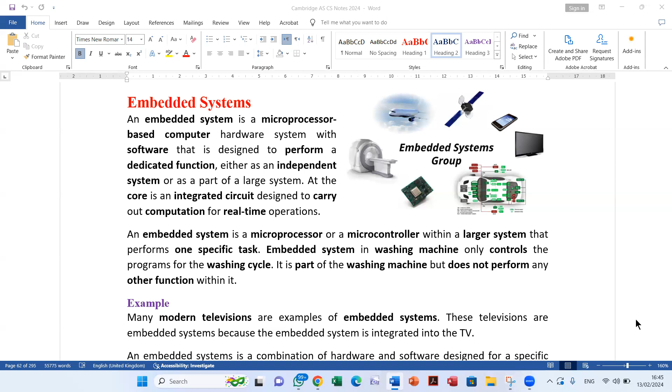So the system will do a function. At the core is an integrated circuit designed to carry out computation for real-time operations. An embedded system is a microprocessor or microcontroller within a larger system that performs one specific task, so it is dedicated. The embedded system in a washing machine can only control the program for the washing cycle. It is part of the washing machine but does not perform any other function within it. So this is an embedded system.

Let us go through as many examples as we could. One example of an embedded system is a modern television. Many modern televisions are examples of embedded systems because the embedded system is integrated into the TV. So maybe the question is asking why this is an embedded system - because the embedded system is integrated into the TV. The computer is inside the TV and can never be taken out of that TV to do something else. So that's an embedded system.

An embedded system is a combination of hardware and software. Any computer system is a combination of hardware and software designed for a specific function. So it is embedded, meaning it is for only one specific function. The system is not easily changed by the TV owner - you cannot easily change that computer to control anything else. It is forever inside that television, so it is an embedded system.

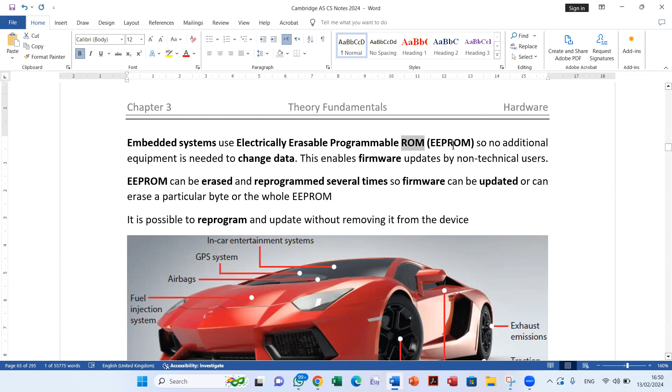Okay, let us take another example about an embedded system: a car alarm system. Sensors could be used in the car alarm, such as a sound sensor. So one of the sensors that can be used in the car alarm system is a sound sensor.

If a sound occurs inside the car, the alarm is activated. You have the car closed and locked, and supposed to be nobody inside of it. If the sensor can pick up some noise from inside of the car, this is interpreted as an intruder. So if a sound occurs inside the car, the alarm is activated.

An infrared sensor senses the heat of the person in the car. So we would like to protect the car with as many sensors as possible. A pressure sensor can sense an intruder who sits on the driver's seat. So if somebody sits in the driver's seat, the pressure sensor detects that intruder.

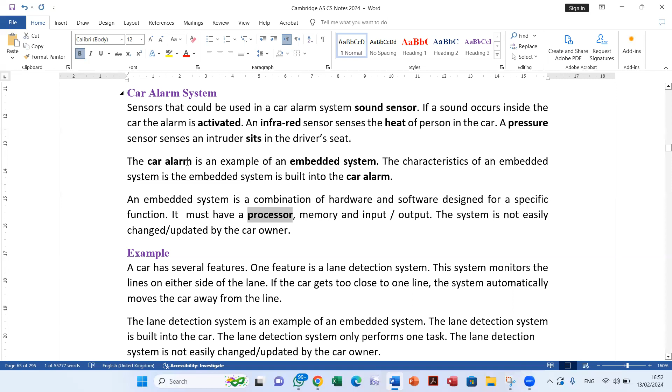Input and output: inputs are normally from sensors, outputs are normally to actuators to control things. The system is not easily changed or updated by the car owner because it is an embedded system.

The last thing to say about cars: as you can see, there are so many embedded systems in cars, like the car alarm. A car has several features. One feature is the lane detection system. The computer inside of the car can see, using a sensor in the front of the car, the lanes. So one feature is a lane detection system.

The system monitors the lines on either side of the lane. If the car gets too close to one line, the system automatically moves the car away from the line. So it is an embedded system.

The lane detection system is an example of an embedded system. It is built into the car and only performs one task. That's why we call it an embedded system. The lane detection system is not easily upgraded or changed by the car owner.

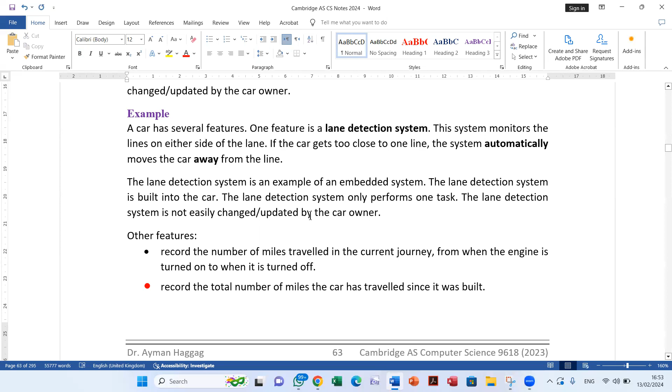Other features - what are other possible features in a car? Recording the number of miles traveled in the current journey, from when the engine is turned on to when it is turned off, is another example of an embedded system in a car. Recording the total number of miles the car has traveled since it was built is another example of an embedded system in a car.

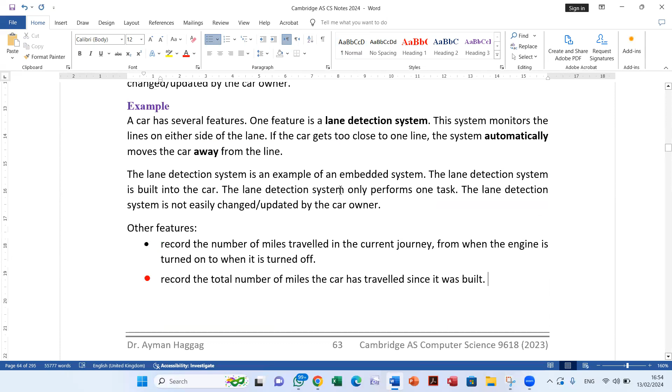Okay, let us talk about monitoring and control systems. An embedded system could be a monitoring system, or an embedded system could be a control system. Let us see all these monitoring and control systems.

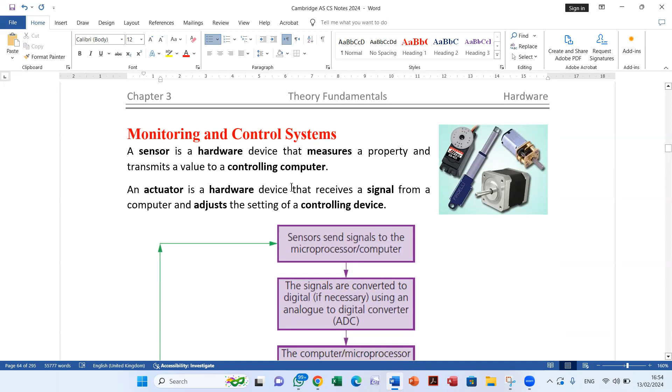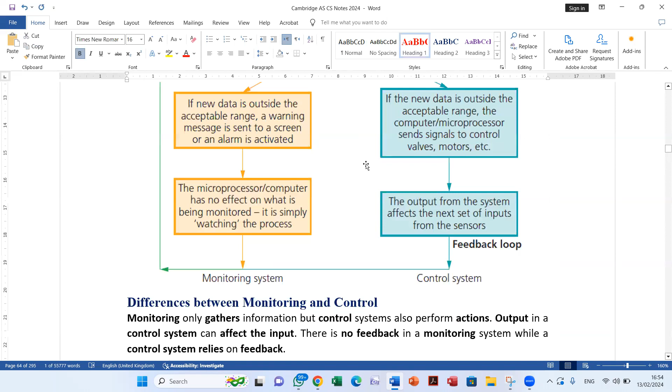Let us study this diagram to know exactly the differences between a monitoring system and a control system. There are things in common. What is a monitoring system?

A monitoring system measures quantities, and if they are out of range, the system only gives an alarm. This is called a monitoring system. For example, monitoring the temperature of the atmosphere, or monitoring pollution levels in a river. This is just a monitoring system.

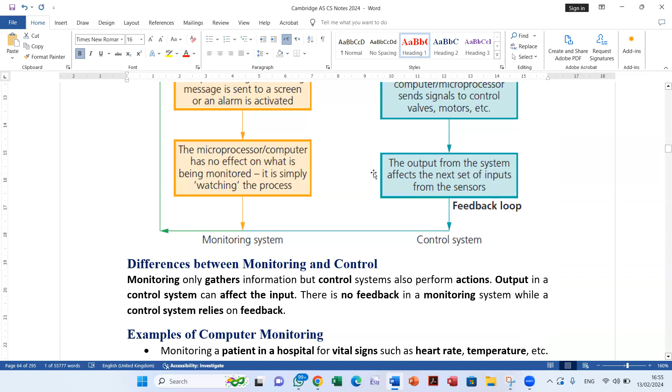However, a more complex, more functioning system would be a computer control system, where, for example, if the temperature is too cold, the computer can take action, such as turning a heater on. Or if the temperature is too hot, the computer can take an action, for example opening windows or turning on a fan.

Okay, so let us study this diagram. A sensor is a hardware device that measures a property and transmits a value to a controlling computer. You may have a temperature sensor that senses the temperature, or a pH sensor that measures the acidity or alkalinity of a liquid.

This could be in a chemical factory or could be in a river where you suspect to have pollution.

A sensor is a hardware device that measures a property and transmits a value to a controlling computer. An actuator is a device that receives a signal from a computer and adjusts the setting of a controlling device. For example, an actuator would turn a heater on or off, or change its temperature. An actuator would switch a fan on or off and control its speed.

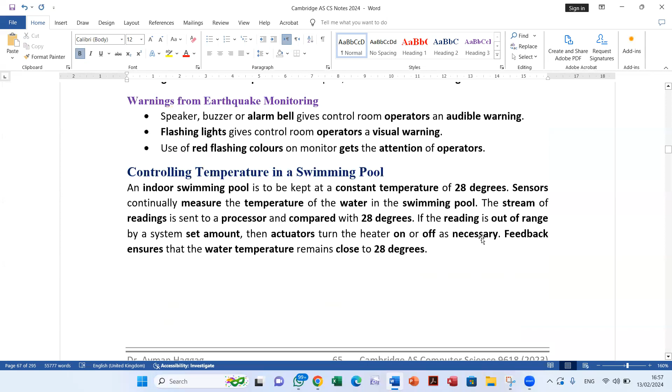In both computer monitoring and computer control, we have sensors that send signal to the microprocessor or microcomputer. So typically input is through a sensor. Signals are converted from analog to digital if necessary, using an analog to digital converter. For example, a temperature sensor needs an analog to digital converter, and even a sound sensor needs one, because sensors produce analog signals and the computer can only understand and deal with digital data, ones and zeros.

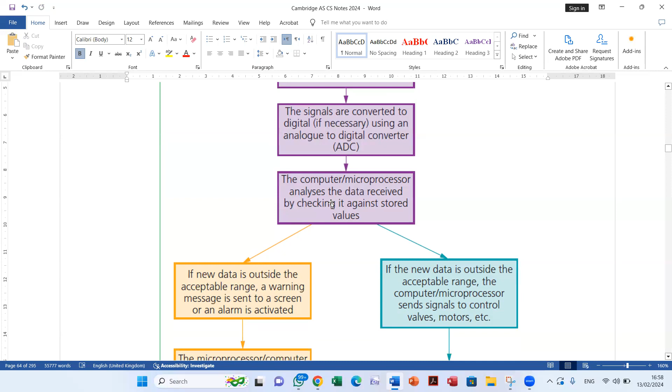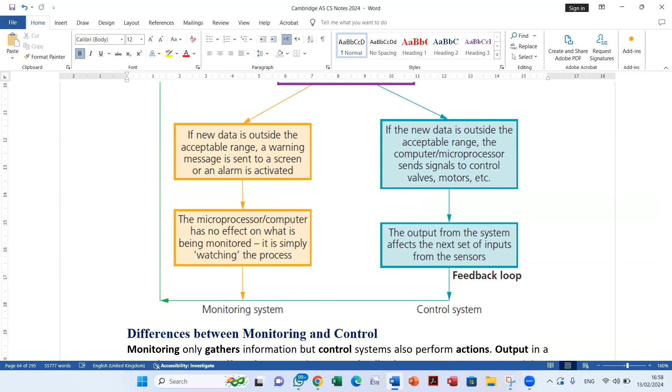Then the computer analyzes the reading and compares it with preset values. Here the two systems differ. If the computer is only monitoring and the data is outside the acceptable range, the computer only produces a warning. So if it is only computer monitoring and the reading is too hot or too cold, the computer would sound an alarm, and that's it, because it is just a monitoring system.

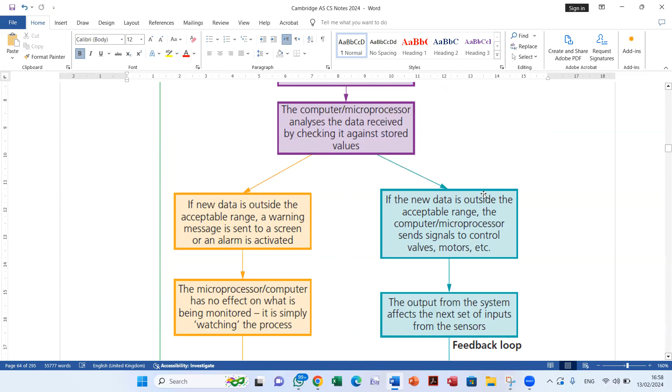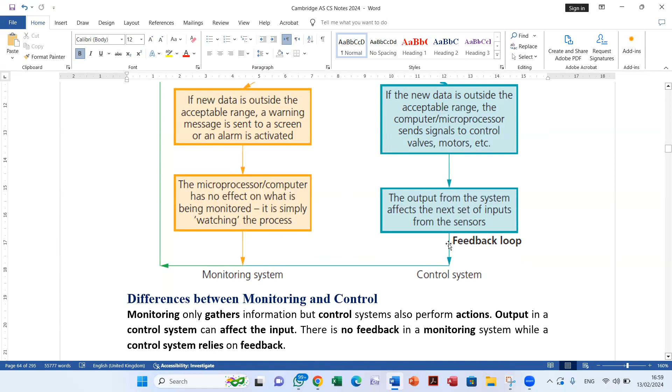However, if it is a control system, if the temperature is too cold, the computer will switch on a heater. If the temperature is too hot, the computer will switch on a fan or open a window for ventilation. This is called feedback. In a control system there is some sort of feedback because the system changes the temperature and the temperature is input again to the system, so it is a kind of closed loop.

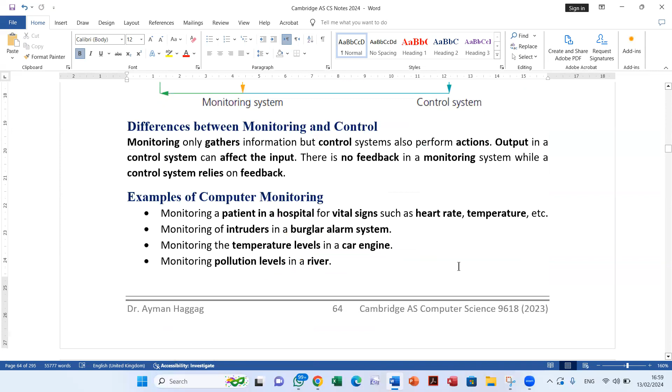That was a bit about monitoring and control systems. Differences between monitoring and control systems: monitoring only gathers information, but control systems also perform actions. Output in a control system can affect the input. There is no feedback in a monitoring system, while a control system relies on feedback.

Examples of computer monitoring and also examples of computer control. Let us study a few examples and then we go to the classify and solve.

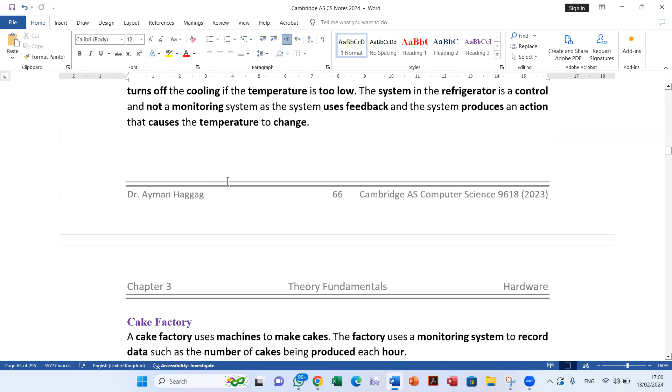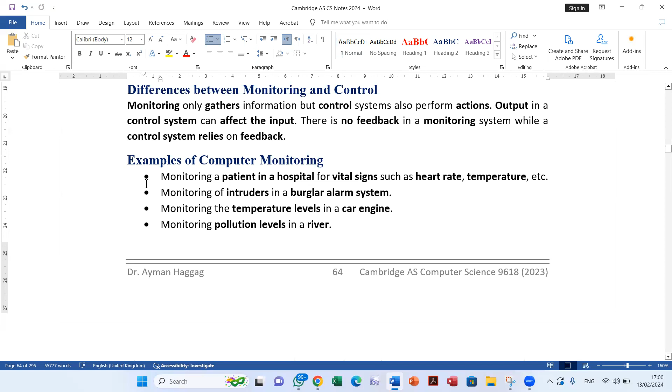Monitoring of intruders in a burglar alarm system would send an alarm to the owner. Monitoring a temperature level in a car engine - if it gets too hot, you get this displayed on the dashboard, and that's it. Monitoring pollution levels in a river - you measure the pH of a river. If it is not 7 and not neutral, not clear, then it is polluted.

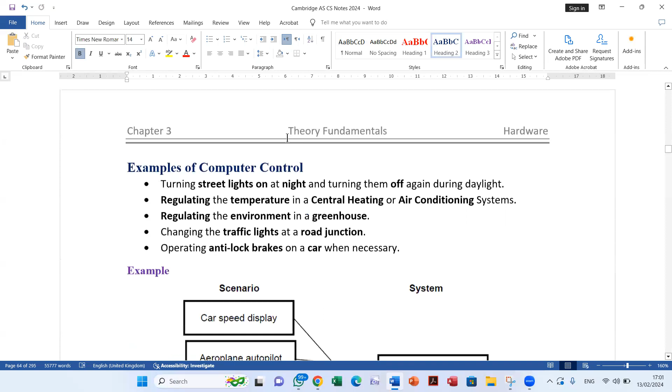These were examples of computer monitoring. Examples of computer control: turning street lights on at night and turning them off during daylight, so the computer automatically controls the lights. Regulating the temperature in a central heating or air conditioning system - when the temperature is too hot, the computer can turn on the cooling unit or increase the speed of the fan. Regulating the environment in a greenhouse, where you monitor temperature, light, and humidity for plants. Changing the traffic lights at a road junction, and operating anti-lock brakes on a car when necessary.

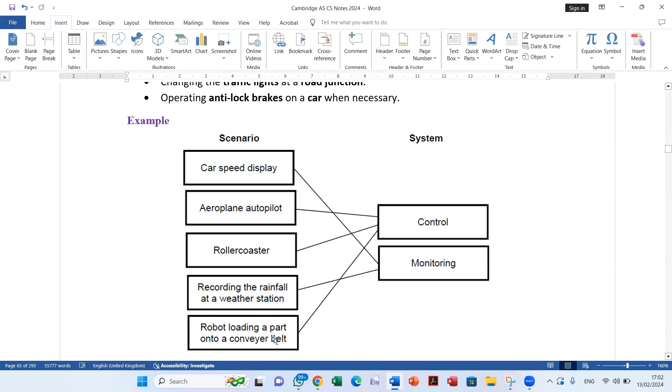Okay, so let us answer these questions. Car speed display - this is just monitoring. Aeroplane autopilot - this is control. Roller coaster, where it's a game in an amusement park and the computer is controlling that roller coaster - this is control. Recording the rainfall at a weather station - this is monitoring. Robots loading a part onto a conveyor - this is control.

Okay, let us go through a few other examples and then we do the classify.

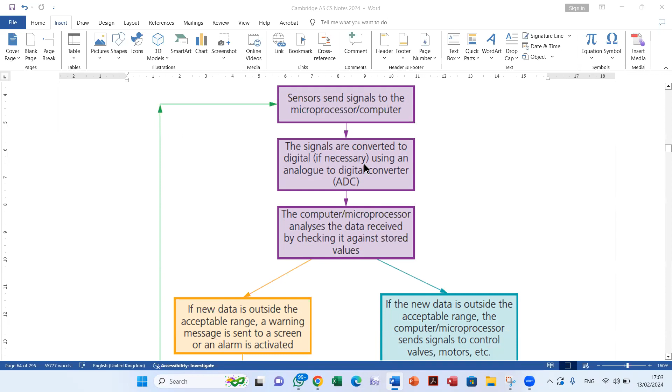Let us go through these few examples. Monitoring earthquake activity. Sensors send signal to a computer. Everything will follow this model: sensors send signal to the computer, signals are converted from analog to digital, and signals are compared to preset values.

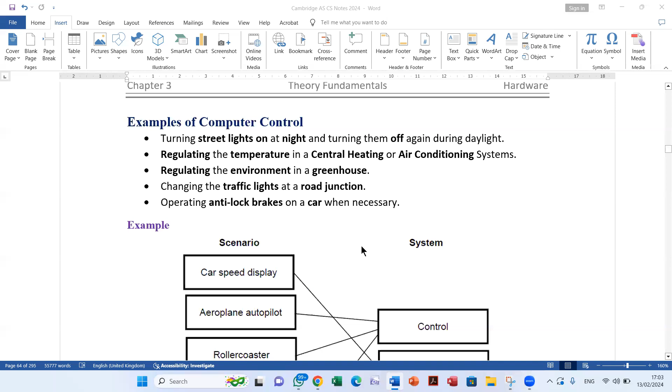So, monitoring earthquake activity: sensors send signal to a computer. The signal is converted to digital using an ADC, analog to digital converter. The computer calculates the activity of the earthquake based on sensor signal. If the calculated value is above a certain threshold, then it is a severe or dangerous earthquake.

Then the location of the sensor giving an alarm is determined, using a map of activity. The location and magnitude are sent to a printer via USB or link. Monitoring is continuous, meaning every few seconds it takes another reading.

As a warning from earthquake monitoring, use a speaker or buzzer to give an audible alarm, or red flashing lights, rather than just printing the results out. So that was an example of monitoring earthquake activity.

Then another example of controlling: controlling temperature in a swimming pool. It is very simple. Measure temperature, change temperature from analog to digital, compare temperature with a preset value, and then do two ifs.

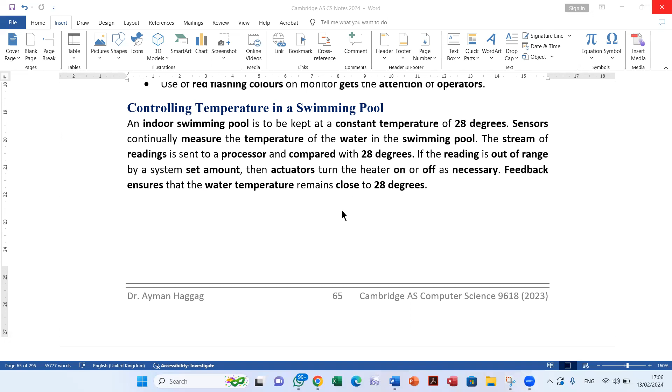For example, if temperature is below 28 by 1 degree, the computer turns the heater on. If it is above 28 by 1 degree, the computer turns the heater off. That range avoids repeatedly turning the heater on and off, which could damage it. Feedback ensures that the water temperature remains close to 28 degrees, keeping the temperature around that value.

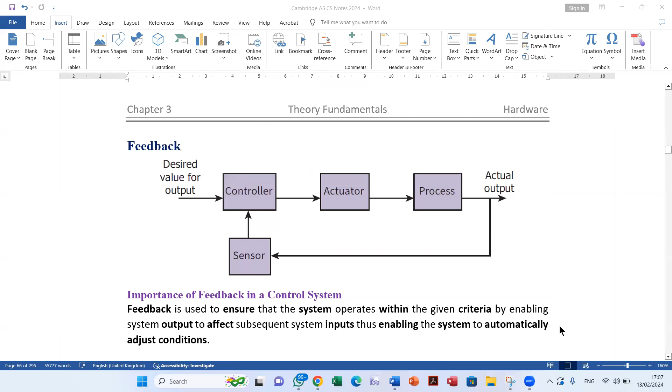This is called feedback. It's important in a control system because feedback is used to ensure that a system operates within given criteria, by enabling the system output to affect subsequent system inputs, thus enabling the system to automatically adjust conditions.

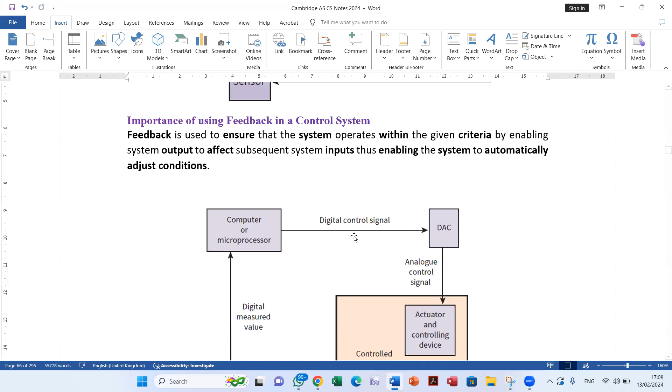So if it gets too hot, the system will turn the heater off. If it gets too cold, the system will turn the heater on. Then it repeats, forming a closed loop like this, controlled by a microprocessor or computer. We say microprocessor when it is a very small computer - it is not a real computer, just a microprocessor or a controller.

The digital measured value from an analog signal is used to control the environment. You have here a sensor and here an actuator. The sensor, for example, measures the temperature. The actuator, for example, turns a cooling system or a heater on or off.

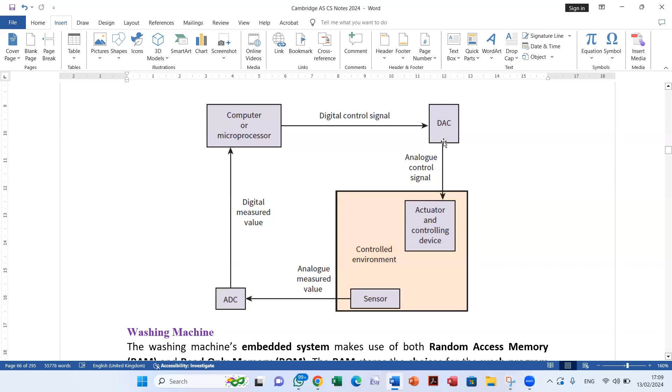The sensor measures the temperature, an analog to digital converter changes it into digital. The digital measurement is input to the computer, which takes a decision and decides to turn the heater on or off, and this could be done through a digital to analog converter.

What other examples do we have? Maybe two or three other examples. The washing machine is an example of an embedded system, and it is computer controlled. The refrigerator is an example of an embedded system, and it is computer controlled. And the cake factory example was very recently copied from the past paper.

That question was very recent in the past paper. The washing machine's embedded system makes use of both random access memory, RAM, and read-only memory, ROM. The RAM stores the choices for the washing program, so the current choice the user has entered, the data from the sensors, and the time left in the program. The ROM stores the startup instructions for the washing machine. So it looks like you need here RAM and ROM.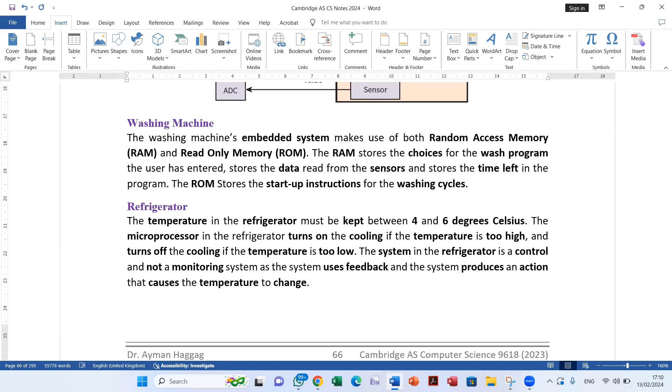Refrigerator: the temperature in the refrigerator must be kept between 4 and 6 degrees Celsius. The microprocessor in the refrigerator turns on the cooling if the temperature is too high, and turns off the cooling if the temperature is too low.

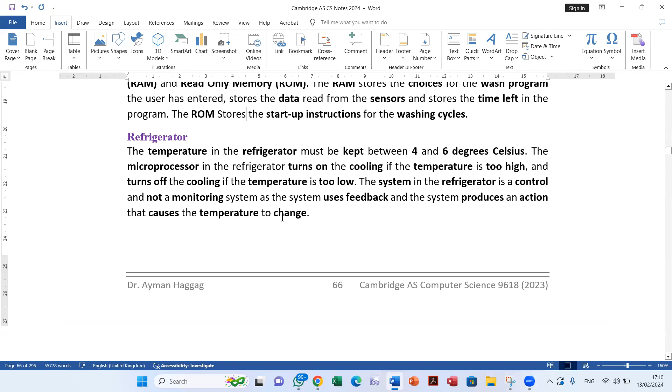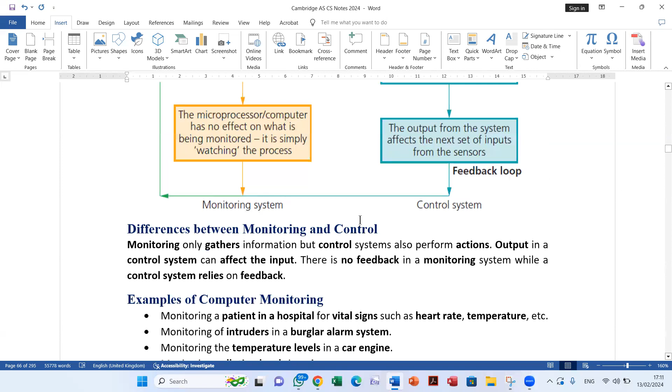The system in the refrigerator is a control, not a monitor, as the system uses feedback, and the system produces an action that causes the temperature to change. So if the system causes an action, then it is computer control. If it just gives a warning, then it is computer monitor.

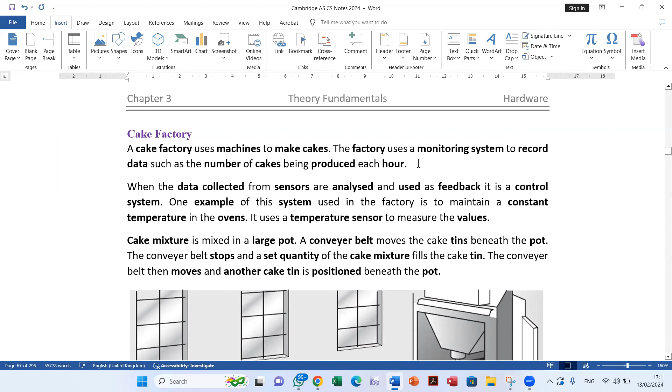Let us study that last example and go to past papers and so on. A cake factory uses machines to make cakes. The factory uses a monitoring system to record data such as the number of cakes being produced each hour. When data collected from the sensor is analyzed and used as feedback, it is a control system.

So when it uses feedback, for example, when that tin is in position, it starts pouring the cake mixture. When the weight reaches a set level, it stops pouring. So it uses feedback, meaning it is a control system.

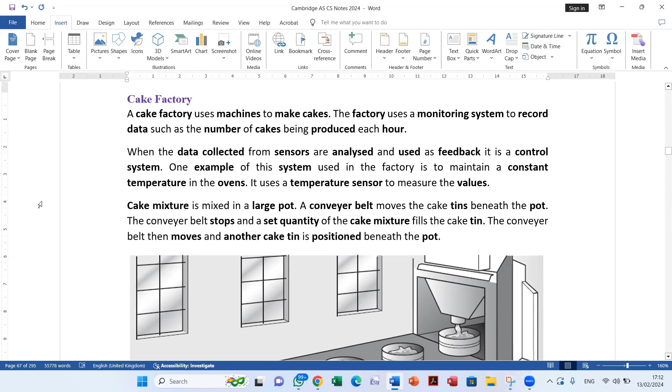One example of this system was the factory maintaining a constant temperature in the oven by turning the heater on or off. It uses a temperature sensor to measure the value. The cake mixture is mixed in a large pot, and a conveyor belt, as you can see, moves the cake tins underneath the pot.

The conveyor belt moves the cake tins underneath the pot and stops at a set quantity of cake mixture to fill the tin. So there is a sensor to detect the position of the tin, and then the nozzle starts pouring.

There is a pressure sensor underneath, and until a certain weight or amount of cake is poured, the nozzle stops. Then it starts moving again for the next tin. The infrared sensor detects the tin in its correct position.

We use an infrared sensor. When the infrared sensor detects the tin in its correct position, a signal is sent to the microprocessor, which sends a signal to an actuator to stop the conveyor belt, and sends a signal to another actuator to release the cake mixture.

So once the infrared sensor senses that the tin is in position, the microprocessor sends a signal to stop the conveyor, and then another signal to start pouring the cake mixture.

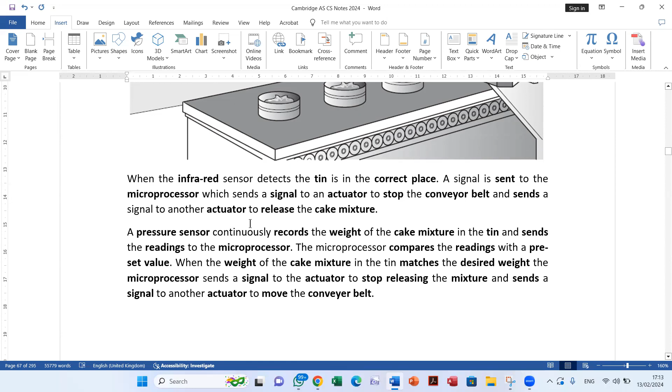Then we have a pressure sensor to measure how heavy the weight of that mixture is. A pressure sensor continuously records the weight of the cake mixture in the tin.

It sends the reading to the microprocessor. The microprocessor compares the reading with a preset value, for example 1 kilogram. If it is just a little bit above 1 kilogram, the nozzle stops.

When the weight of the cake mixture in the tin matches the desired weight, the microprocessor sends a signal to the actuator to stop releasing the mixture, and sends a signal to another actuator to move the conveyor belt.

I have to stop here because I cannot start logic gates until I completely solve plenty of questions.